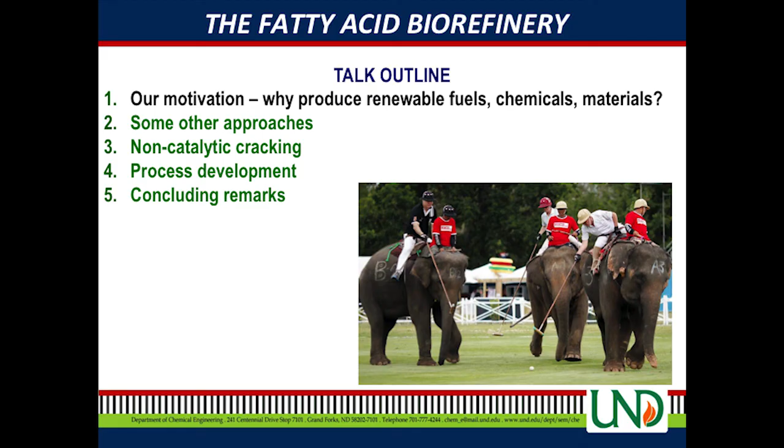All right, so let's get back to our talk, and we'll talk about our motivation. Just seeing if you're awake. We don't actually have any elephants in North Dakota. We have some extinct mastodons, but that's about it.

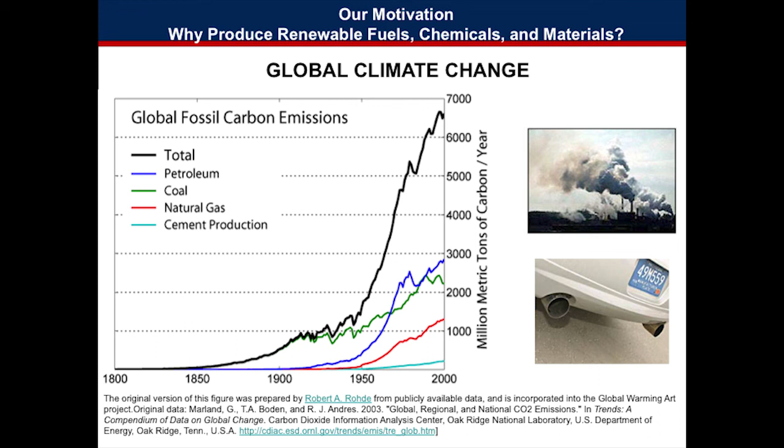So, of course, the motivation is why you're all here in this society anyway, and that's global climate change. This is a much harder argument in the U.S., where, believe it or not, probably almost half the population is very confused about the issue. Scientists are not confused at all, but about half the population has no idea anymore because they keep hearing lots of words from both sides. I don't think you have quite as big an issue with that here in the UK. I could be wrong. If I am, let me know. But I'm sure you get some pushback anyway.

But in particular in North Dakota, where I live, it's a very conservative state and very pro-business, and anything that smacks of a new regulation is verboten. But you know the argument. What you cannot argue with is the fact that we've taken a lot of carbon that has been below the ground for a lot of years, and we've put it in the air. And carbon dioxide does have different physical and thermal properties than nitrogen and oxygen, right? It has a higher heat capacity. It has a higher radiative reflectance, right? And these things all do bad things for the environment.

I think most global scientists now believe we are past the tipping point. Global climate change is now irreversible, at least in the short term. So it's going to be many, many years before the world can turn it around, but we have to at least start slowing down before we can turn it around. And so that's the challenge that you will face, youngins, because us old gray hairs, we didn't fix it. You get to fix it.

Our predecessors left us tons of stuff to fix. We fixed some of them. Some of them we didn't know about, like this one. So you get to fix our mistakes. That's the way it works. And then your mistakes, you get to pass down to the next generation. And that's why we need people to train the next generation of researchers, and we need the next generation of researchers. All right. Try not to hold it against us too much.

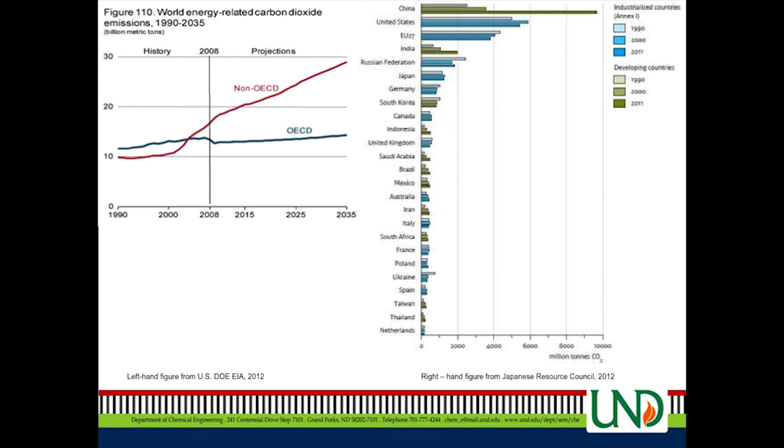Okay? So if you want to deal with global climate change, you can't just deal with it in our countries. We have to look at global solutions, which means understanding what is important in those global societies. What is it that will allow them to move toward the solutions to global climate change? They won't be the same as here or in the US. Okay? There's different motivating factors. There's different issues they are dealing with. And we have to understand them and look for solutions within the context of what they're dealing with.

Or they just simply won't go along with it. And there's nothing the rest of us can do. And nothing will get done. So we have to work with them, cooperate. But that leads to an opportunity. Anytime we have to cooperate globally, there's room for dialogue, better understanding across the globe, and that tends to lead toward peace rather than war. That's always a good thing.

By the way, in case you can't see it, that's where the UK ranks by itself. It's currently just in the top 10, about to fall out of the top 10, as CO2 emissions in the UK have actually gone down rather than up, as they have in all of Northern Europe.

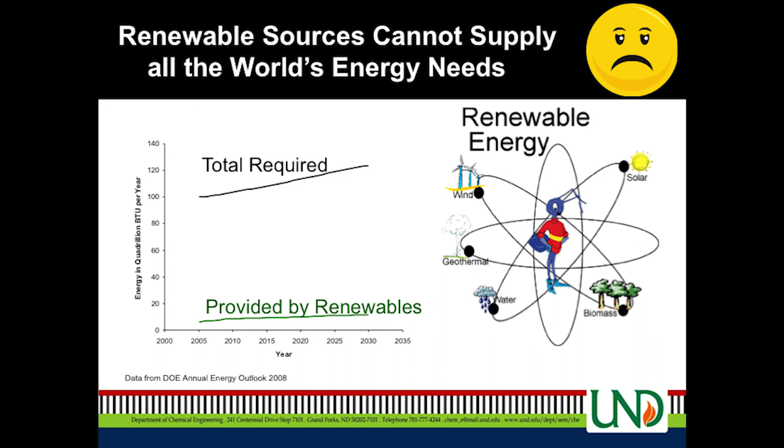Right. Okay, so talk about renewable energy. That's good because, of course, renewable energy can't solve the problem. So why work on it? Does this surprise you? Did you already know this? Renewables are not the answer. Okay? Look, even if this projection from the Department of Energy in the US in 2008 is off by a factor of 10, we're not there, okay? So renewables in and of themselves will not solve this problem, will not allow us to displace all of the fossil energy that we use, okay?

But it can be part of the solution, and that's why we keep working on it. So along with conservation and efficiency gains, the environmentally acceptable use of coal, efficient use of petroleum with gradual replacements to avoid economic disruptions, and that's a key for the developing world, and breakthrough technologies of the future. These are the areas like actual affordable solar energy, things like that. These are the technologies that we need.

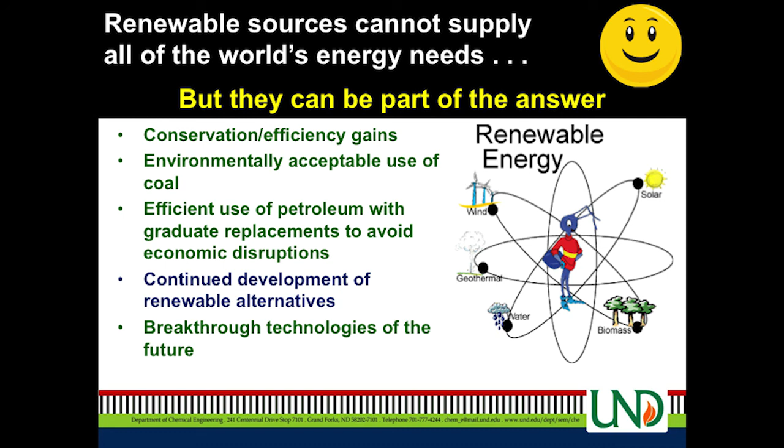If somebody could figure out a way to safely deal with the waste from nuclear power plants, we'd be golden. Then we'd have an answer. But as long as we can't yet deal with it, it doesn't matter that it's a real small amount of waste if it's got a 10,000-year life, right? It's a leaky faucet with a bucket under it. Drip, drip, drip. The bucket will fill up. So we need these types of solutions in order to move ahead.

And we have to work on all these fronts because there isn't another thing like oil, right? There isn't another one of those that we can just grab. Okay, we kept this one because we were waiting until oil was done. Oil's about done, let's go grab it. There's nothing there when you grab, right? So it's a lot more complicated, the problem's harder.

That shouldn't surprise you. If you're working on research in your lab, recognize that your research will be harder than that of your advisor, your sponsor, your faculty member that's looking over your shoulder. You know why? They did the easy stuff, they left the hard stuff for the next guy. And we said the same thing about the generation before us. It always gets harder, more complicated, et cetera. Easy solutions get done early, right?

All right, so let's look at some of the other renewable approaches.

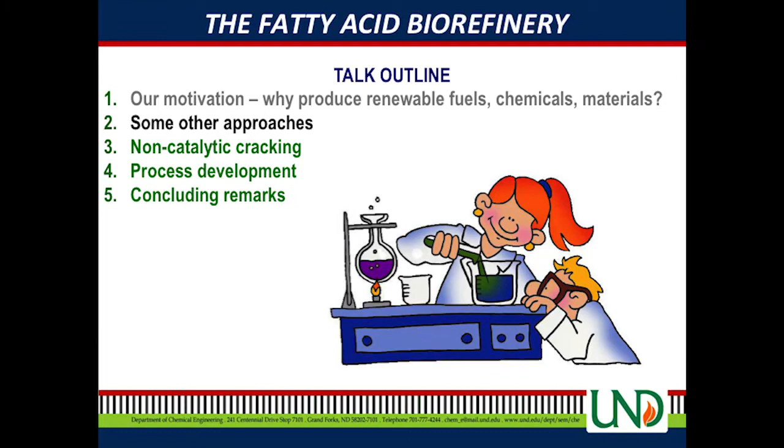So are you motivated now? You okay? Anybody asleep yet? Not yet? Okay, good.

All right, so first some practicalities. Feedstock costs are dominant, okay? It's actually pretty cheap to pull oil out of the ground, even with the harder to get oil that we have today where we're down 10,000 feet and running 5,000 foot horizontal stringers and fracking it. It's still much cheaper than it is to grow this stuff.

Okay, so feedstock costs are dominant, and that's why a lot of people are trying to look at, can we utilize waste better? Can we look at stuff that we don't really want to use for other things? In the US, because we produce a lot of the world's food, we're spending a lot of time looking at integrating fuel crops into the rotation.

So we're not actually displacing food crops, which is one of the big myths, by the way. You rarely actually displace a food crop with a fuel crop. Food crops are just worth more. You just change your crop management practices to add them into the rotation instead of something that was worth less. Farmers are great capitalists. They figure out what makes the most money, and that's what they're going to grow and keep their land going. So we do a lot of that.

So feedstock costs are dominant. The key is trying to convert as much of the inlet carbon into something usable as you can. And the other part about that is if you're not converting it into something you're going to use, where do you think it ends up? It's going into the air, which is what we're trying to avoid. So we want to use as much of that carbon as we can and put as little of it into the air as CO2 as we can.

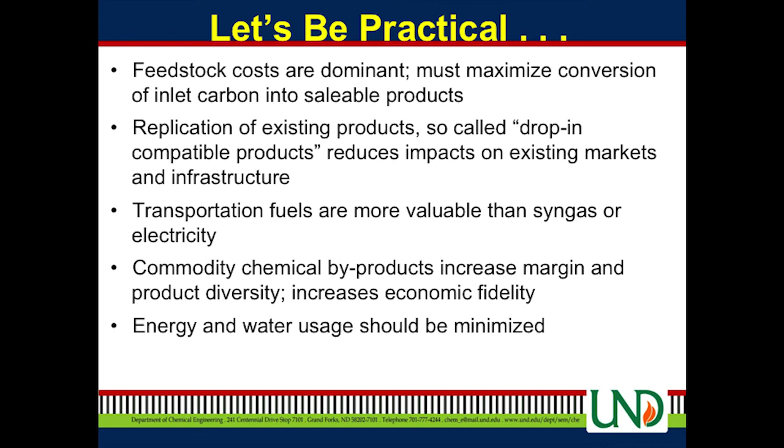Also, transportation fuels are much more valuable than syngas or electricity. So if you're making a methane replacement or you're making electricity, that's a lower value product than a transportation fuel. Transportation fuels have to be liquid, they have to have high energy density, they must be stable, and they must operate over a large environmentally dynamic range, right?

So they have to operate in the winter, they have to operate in the summer. There are changes to the blends that refiners make, but it's not a lot. The basic components are the same. So it has to have a lot of dynamic range. That's why fuels are heterogeneous, by the way, transportation fuels. They're not made of one chemical compound. They're heterogeneous on purpose because it gives them that dynamic range. It gives us the ability that when I hit the accelerator, I have compounds in there that are good for that range, and when I'm at idle, I have others that are good at that range. Things like that increase the overall efficiency.

Commodity chemical byproducts increase the margin and the product diversity, which increases the economic fidelity of a fuel plant. Petroleum refineries are enormous, and they're incredibly efficient. There may be no more efficient industry in the world than petroleum refining. The margins are very, very low. And because of that, that's who you're competing against with a brand new technology. It's very hard to do. So you need something to give you an advantage. Plus, those petroleum refineries are also producing lots of byproducts that have more value than the fuel. So if you don't have them, how are you going to compete against them?

Now, when you're talking about byproduct chemicals here, you can't be talking about, say, an ingredient for a pharmaceutical, like a new antioxidant. One plant will provide the world's supply. What are the other 990 plants going to do? They can't make that one because the market's saturated. So you need high volume commodity chemicals, which drives you very much to polymers. Polymers are ubiquitous in society. They're everywhere. You're wearing them, you're sitting on them, you're seeing through them, everything we do, we use polymers now. It's the biggest market we have.

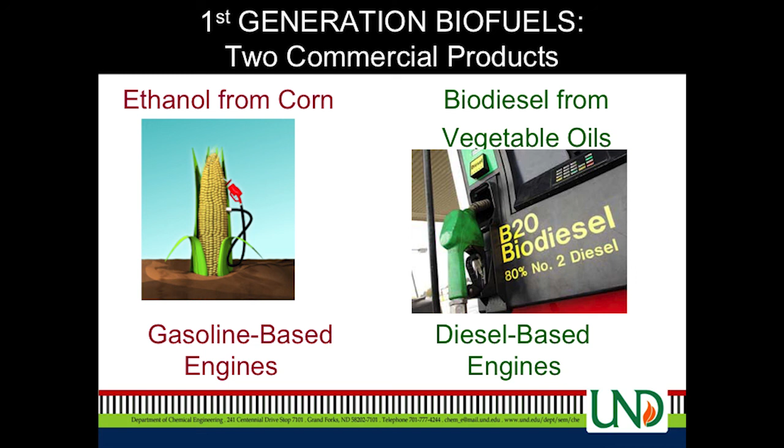So ethanol from corn, which goes into gasoline engines, is one of the two commercial first generation fuels. And the second one, biodiesel, is basically a thermochemical way to do that. So those are the first two that came out.

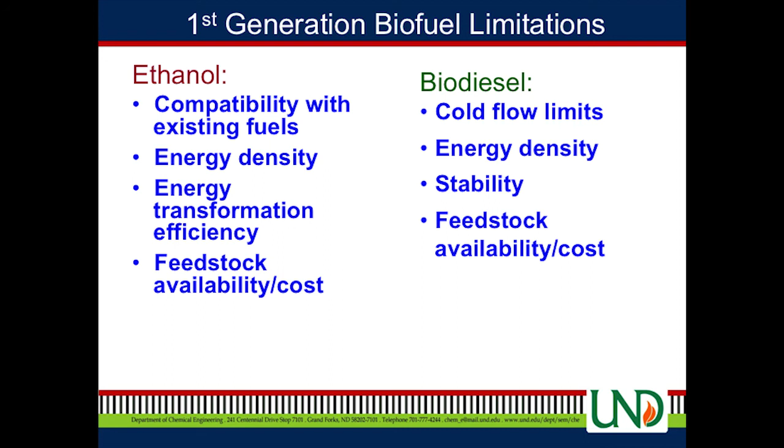They have some clear limitations. Ethanol isn't really compatible with gasoline—one's polar, one's non-polar, right? You really have to work to get them to mate together. At small concentrations they're fine, which is where the limits you see on them come from—E10 and E85 are the limits, that's the solubility limits, by the way. You can boost those up a bit with some expensive additives, but we'd rather not do that. There's also energy density problems with ethanol, so you won't get as much per volume of fuel you put in your tank—you won't go as far. And the energy transformation efficiency for ethanol is fairly low. There were a lot of arguments when it first came out that it actually took more energy than you got. I think most people are convinced it's probably about a wash, but it's not that efficient.

And of course, if you're making it from corn, you're competing with food and you have feedstock availability issues, although the market does adjust to a lot of that. When I moved to North Dakota in 2000, the corn line was about 80 miles south, almost to the South Dakota border. The corn line is now up into Canada—that's how far north it's still profitable to grow corn. Corn has a longer growing season, and you can grow it longer for fuel than for food because you can let it freeze. You can do that for cattle feed too—if you're feeding corn to livestock, you can let it freeze and harvest it after, and you can do the same for fuel. But if you're going to eat corn, you don't want it frozen on the stalk—believe me, it doesn't taste good. We've already had freezes in North Dakota since probably early September, so it's a much shorter growing season.

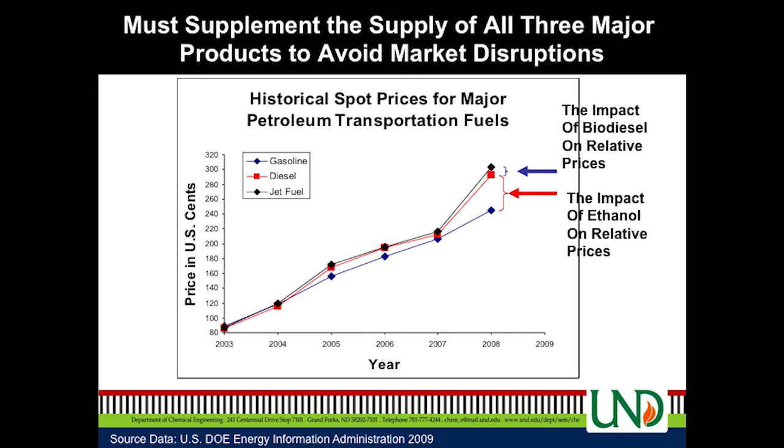Here's the data: around 2003, the wholesale delivered spot price of these three fuels was essentially the same. See that? By 2008, look now—see the gap at the bottom? That's what I call the ethanol gap. That's what ethanol being introduced to the market did to the prices.

I heard somebody just the other day say, even here in the UK, do you remember when diesel was cheaper than gasoline, than petrol? Remember that? All right, you weren't born yet—just kidding.

So it's going like that. The poor airlines are really getting hit, because nobody's going to run a refinery just to make jet fuel—it's the smallest of the three. So if we could completely replace gasoline and diesel, we'd better have something for the jets, or air traffic will come to a halt.

Now in the UK, that's not as big a deal for you—you have these things called trains. But in the US, where you'd take a train, we fly. Because for you, going all the way across the country is about a 6-hour train ride; for us, it would be a 40-hour train ride. Where I live, it's a long way to anywhere—6.5 hours to the nearest major city of a million-plus people. You're near the ocean, so this distance problem is significant for us.

So what that means is we've got to make sure we don't just solve one problem and create others. We have to be mindful of this.

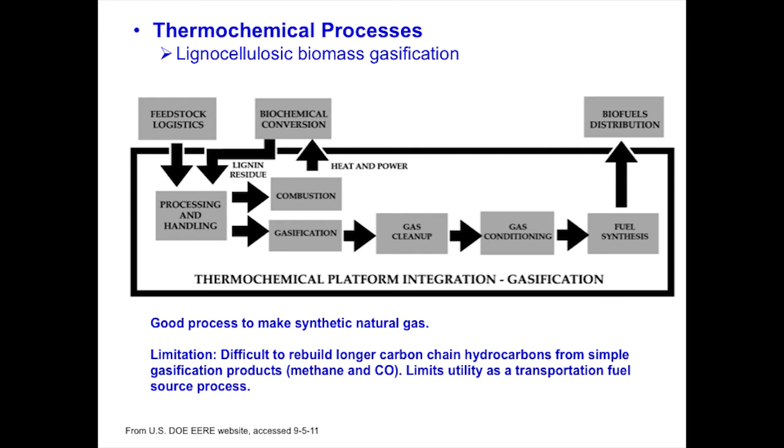It's good for making synthetic natural gas, by the way. Gasification is great for that, very efficient. It has some issues, but it's not bad. But it's really difficult to rebuild longer carbon chains. It's very inefficient and very expensive, and hence this technology is stuck at that last box, fuel synthesis, because it's just really hard to do.

The best process developed for this was developed in World War II, believe it or not. It's called the Fischer-Tropsch process. It was developed by the Germans, who had no more access to petrol, and so they developed it. They knew it wasn't a real good way to make it, but that's what they had, so they did it. And that's still the best way today. Nobody's beaten it yet, and there's a lot of people trying, I guarantee you, but not yet.

So it's hard to build carbon chains up. But do we have to really gasify it all the way to methane? The answer is no, and we can do what's called fast pyrolysis. A fast pyrolysis unit is basically a bad gasifier. You decrease the residence time a lot so it's only in the gasifier, the combustion unit, for a short period of time. You do it without oxygen, and all you're trying to do is partially break those bonds. You just want to break a few of them, not all of them. That was kind of the original concept.

You do that, everything comes out of the top as a vapor, or it's a char. You collect the char, which you can use for all kinds of things. Then you take that vapor to a condenser, condense all those big molecules down, and now you've got bio-oil. We're in business, right? Wrong. That oil is the nastiest stuff you've ever seen. And depending on what you've made it out of, it may not even be an oil—it may be an emulsified goop, because there's enough polar stuff in a lot of it that it'll emulsify into a big goop.

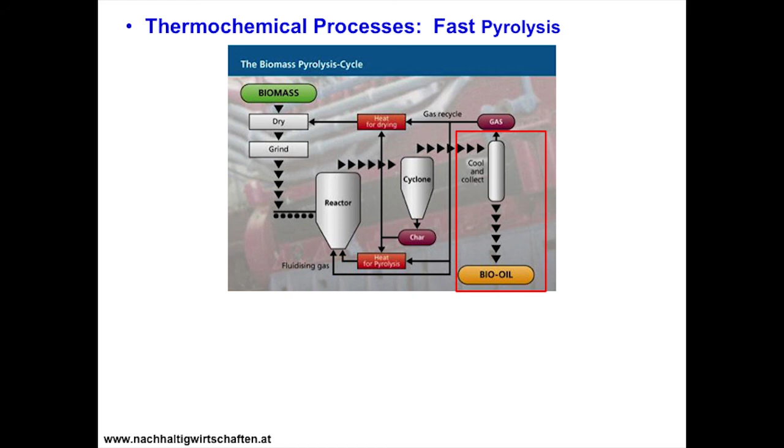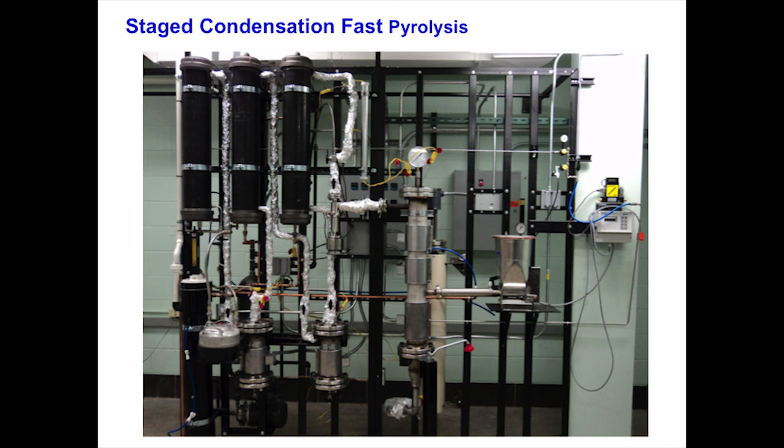So when we come to this part right here, let's not cool the whole thing and condense it all at once. Let's condense it in stages. Let's take the heavy bits first, then the next bits, then the next bits, all right? We came up with that concept independently of two other groups that came up with it at essentially the same time. This is what our unit looks like—ours are just as ugly as the units you make, all homemade, built by students.

So the biomass gets ground up, goes into the fast pyrolysis unit, stays in there about half a second—that's this part right here on the diagram. Then we come out of there and go into the second section, which is three condensers. We have a condenser and a collection pot, condenser, collection pot, three of those, and then the gas out the back. If we wanted, we could refrigerate that down and get even more stuff out.

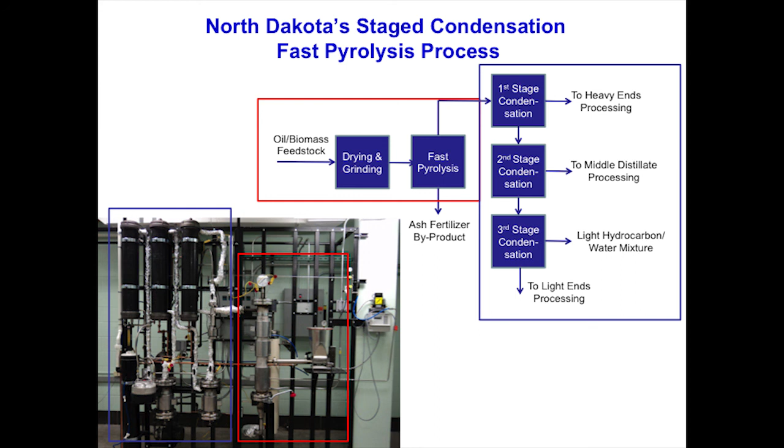What you find when you do this is you'll get this really nasty stuff—the real heavy stuff you don't like mostly comes out in the first cut. The middle stuff actually looks pretty decent for processing into transportation fuels, it's actually workable. And the light hydrocarbon-water mixture—all the emulsifying agents were in the heavy cut—so now they phase separate and you can do stuff with them and use them. So it looks like a pretty attractive concept.

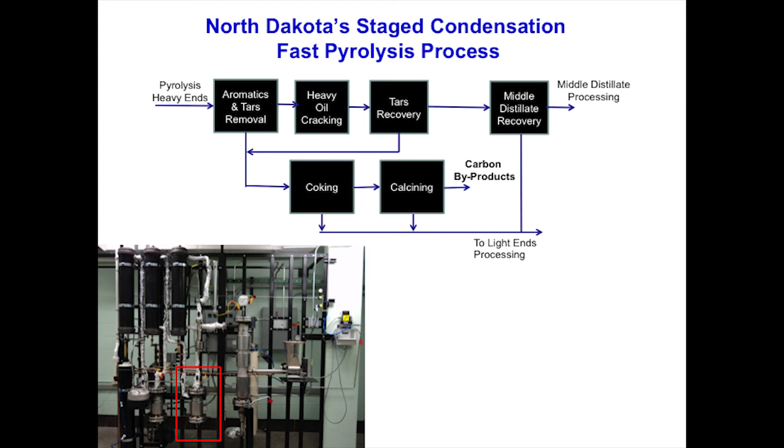The heavy ends—what our concept is, one way you could do something like this—is to take those heavy ends, separate out the aromatics and the tars from the longer chain hydrocarbons, crack the oil, take the tarry stuff and coke it, crack the oil and coke the tar stuff, and you can get a really nice carbon product, very pure. Because if you make this from biomass, all those metals and things that are in coal and petroleum aren't there.

So it's actually a really nice, clean, high-grade, anode-grade coke, which is used for all kinds of things, anodes and other things.

Middle distillates, you knock out the heavies and the lights that are still in it because we just did one crude condensation. Then we can deoxygenate it in a number of different ways, and then probably do one trim purification, and we should have our products. Or a series of purification and separation units, distillation, but stuff that's easy to do and we know how to do. That's the good stuff that we'd like to make in a product.

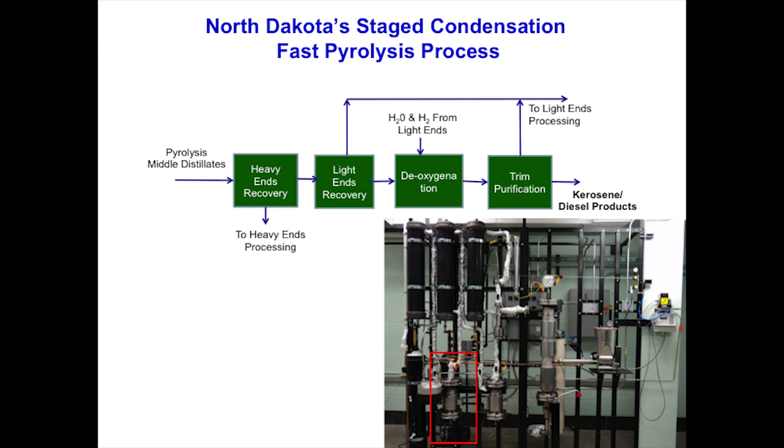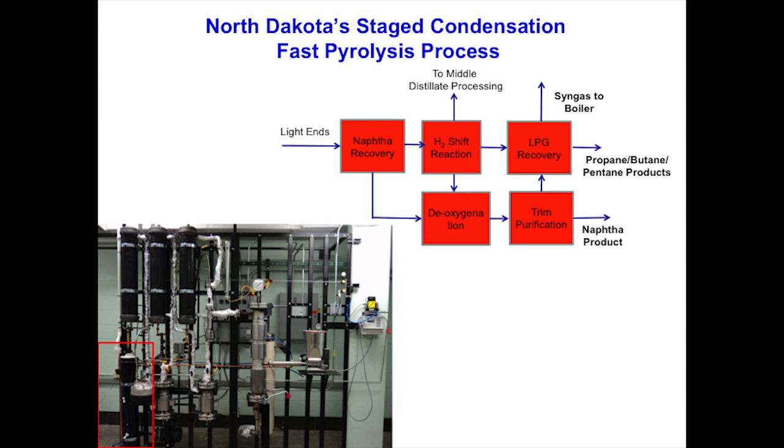And then the light ends, we can recover some naphtha out of that to make a naphtha product. We can make propane, butane, what's known as LPGs, and then the syngas we can send to the boiler, and we can even shift some of the CO and make some hydrogen if we want to use that for our deoxygenation. So that's one concept of how you might do that.

All right. Going to the biochemical, I'm running way late, sorry. Oh well. Fermentation alcohols, of course, was the first way this was done with yeast. There are now, but that bioreactor can also be bacteria, it can be algae, and there's lots of different things that people are suggesting in trying to do that. That's not really my area of expertise. I will say this about it.

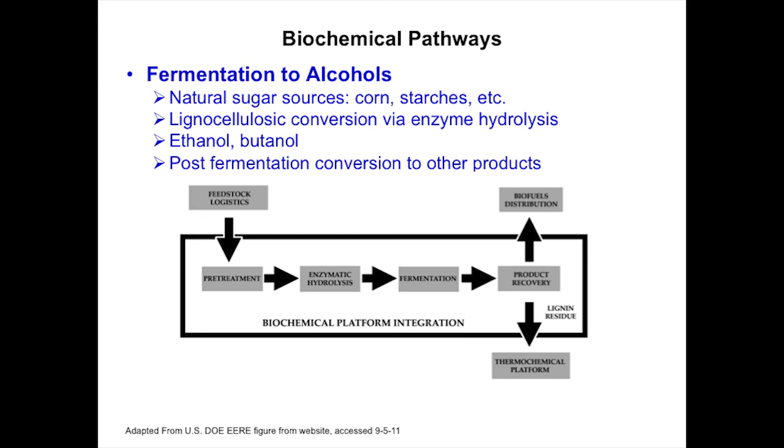Although some of these are fairly intriguing, they're probably better for chemicals than for fuels. And here's why. They usually make one thing, so you have purity on your side. Purity is good for chemicals, bad for fuels. Dynamic range, remember? Secondly, bioprocesses are inherently less efficient than chemical processes.

You've got to deal with running at least semi-batch in operation. You have to keep things alive, so that gives you kinetic limits on temperatures and pressures and things like that. And so they're never as efficient as chemical. So if there are two solutions that look equally viable, and one's chemical and one's biochemical, the chemical one will almost always be better commercially than the bio. It's not 100% true, but it's usually true.

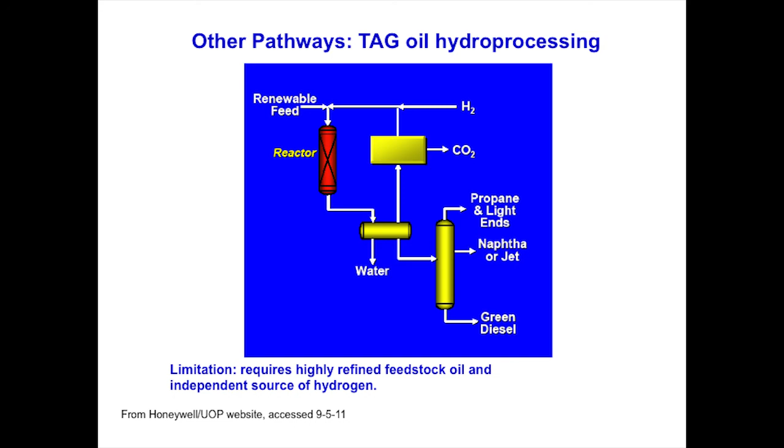Triacylglycerides are made by crops. It's a glycerol backbone with 3 fatty acids on it. So you, as a mammal, make fatty acids, free fatty acids. That's what that is, right? But most living things make triacylglycerides instead of free fatty acids. So they're made by all kinds of things, bacteria and algae and lots of plants. It's amazing how many plants make these things. Every time I turn around, I'm finding another one. Anyways, that's the feedstock here.

You go into the reactor. You blast it over a catalyst, which will knock off the backbone, deoxygenate the acid group on the fatty acid, and some of them also isomerize, or they'll do that in a second step, so that you get this dynamic range and mixture, and you come out of there with a reasonable jet diesel cut.

During the separation process here, some of that will crack. It naturally will crack, and they'll get some light ends on top of that. That's the process that is mostly going into the world today. All the airplanes that are flying green jet fuel today are flying hydrotreating fuel today. Right now, their limit is 50% of the fuel. And there's a reason for that, which I won't go into because we don't have time. You'll just have to figure it out.

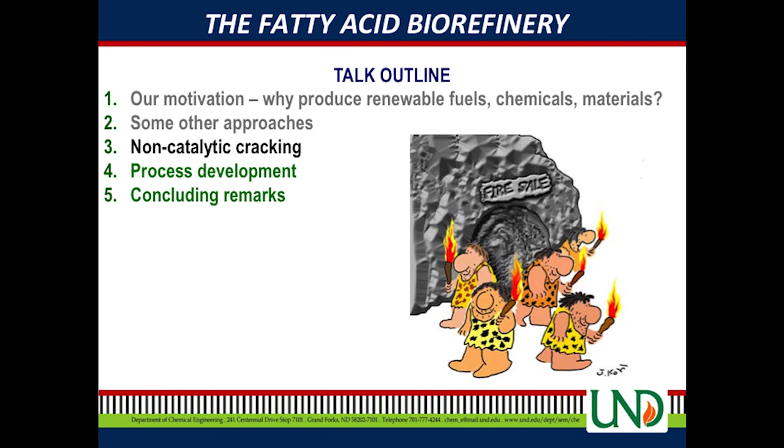All right, let's talk about my stuff. So our stuff is non-catalytic. It's thermal cracking. So instead of hydrotreating, we're just going to pyrolyze. So it's just like pyrolysis, except the conditions are slightly different.

We fell into this. I had a post-grad that I didn't feel very confident giving him a catalytic reactor with. So I said, let's start with non-catalytic, and if you can do that, I'll let you do it with a catalyst. We never got to the catalyst because it works so well with the non-catalyst. I had subsequent students look at it both ways, and what we found out was that catalytic cracking isn't actually catalytic cracking for triacylglycerides as it is in hydrocarbons. It's actually non-catalytic cracking with secondary reactions occurring on the catalyst.

Okay, so you can do those secondary reactions all in one step, put the catalyst in the reactor. That means when you form tars, it gets all over your catalyst. Or you can separate the two steps out, do the non-catalytic cracking, recover the tars, put the non-tarry stuff over the catalyst, and do what you wanted to do with the catalyst separately. Your catalyst will last longer, and you've also recovered the tars instead of turning them into CO2. That's the advantage of this process.

Okay. It produces drop-in compatible fuels. The fuels meet the petroleum specs, not the hydrotreating specs. To meet the hydrotreating specs, we would remove the aromatics that are in it, then turn around and sell them back to the airline or the fuel company so they can blend them back into the hydrotreating fuel to make a full fuel, which some of them do.

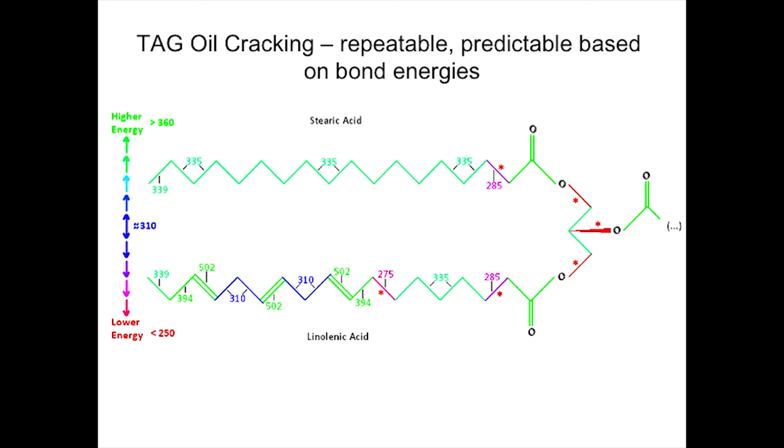Okay? Now, I say that even though that's what you get. Look at the complexity there. It is repeatable and predictable, even though you're getting 300 plus compounds. Given the exact same fatty acid composition, I can crack it multiple times and I will get the same profile within the limits of analytical accuracy. Okay, so it is predictable and repeatable. So you make a diversity of things. That's good for fuel, not as good for chemicals. But you make some interesting things.

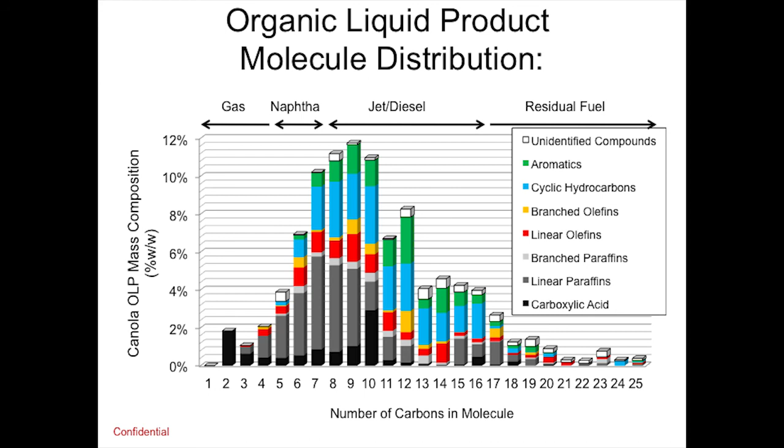You make a lot of carboxylic acids. Turns out they're almost all alpha carboxylic acids. You make a lot of olefins, and the linear ones are almost all alpha olefins, which is also good if you want to make chemicals out of them. And you'll notice there's the aromatics that I said you have to remove otherwise. You see also where this is. Now, most triacylglycerides are primarily centered around C18, C20, and that's why when you break them apart, you get a lot of C7s through C12s. That's the sweet spot. That's what we want. That's middle distillates. So that's why we like this.

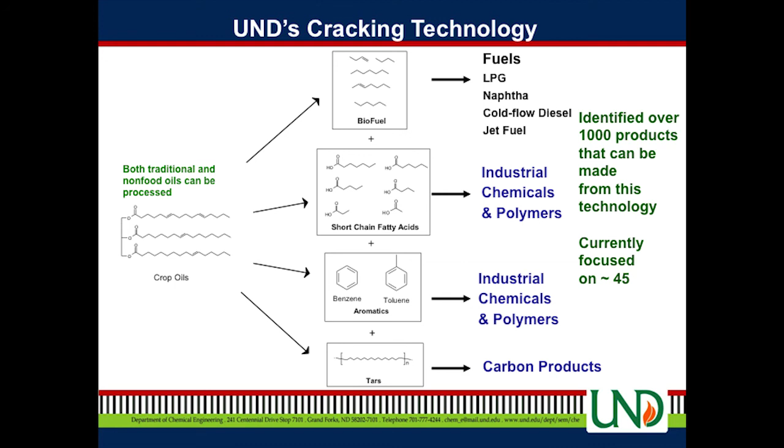So we can use all kinds of different oils. We're going to make fuel, and we can make some chemicals out of the short-chain fatty acids and the aromatics and carbon. We've identified a lot of things we could make, and we focused in our lab on about 45 of those, actually demonstrating them. The basic scheme is you put the oil in the reactor, break it apart, you end up with light, non-condensable light fraction, middle distillate fraction, heavy fraction, separate them out, treat each one separately and get your products.

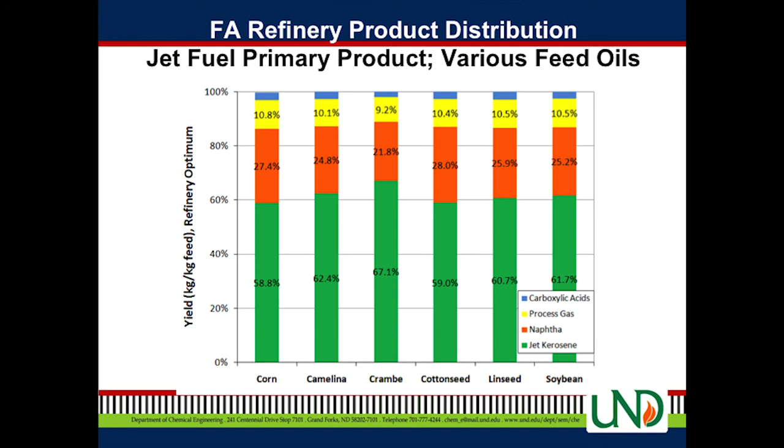So we've run a lot of different oils. Here's a suite of 6 oils we ran, and you can see that it's fairly consistent in composition. You get mostly jet fuel if you want to run it for jet fuel. You can crack it differently to make more diesel and naphtha, but notice that the gases are very low. And that's good. You don't want a lot of gas because, again, syngas isn't worth as much as the fuels.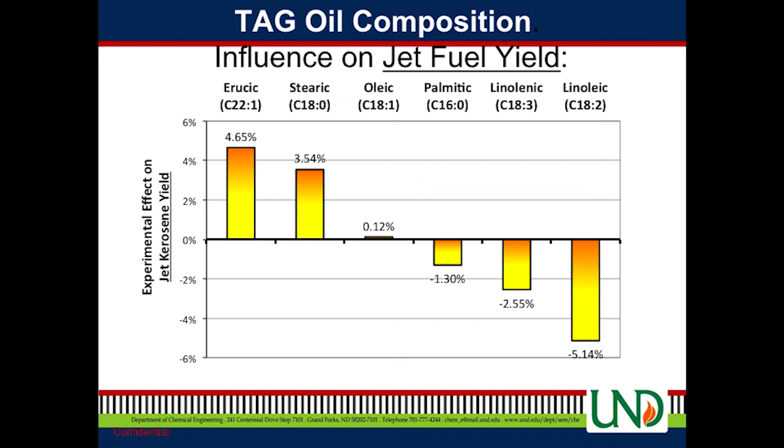We can predict the influence. We've done enough runs now and have models. We've run hundreds of cracking reactions of everything imaginable. So we can actually predict what the effect of a different fatty acid chain in a plant will be. So we've actually worked with Bayer CropScience to look at some of their non-edible crops like camelina and some high erucic brassicas to, not genetically modify, but naturally mutate those crops toward having the types of fatty acids that increase the yield of the fuels.

Right. So why do we want to do it non-catalytic? I've kind of said this already. Catalysts will foul. In a petroleum refinery, you have good metal catalysts. They're robust. You can fluidize them, send them to a regenerator, burn the carbon off to CO2, put them back in. Here, you're primarily looking at zeolites or silica alumina-based catalysts. They're not nearly as robust to do these catalysis. Or some of them are platinum on carbon, very expensive catalysts.

In any event, if the catalyst is in the bed, the tars will gunk up the catalyst. You will have to burn it off. And so that's up to 10% of your inlet carbon that's going up to CO2 that in our process we actually recover. So if you design your reactor right, it's not going to plate out on the reactor. You just have to design it right.

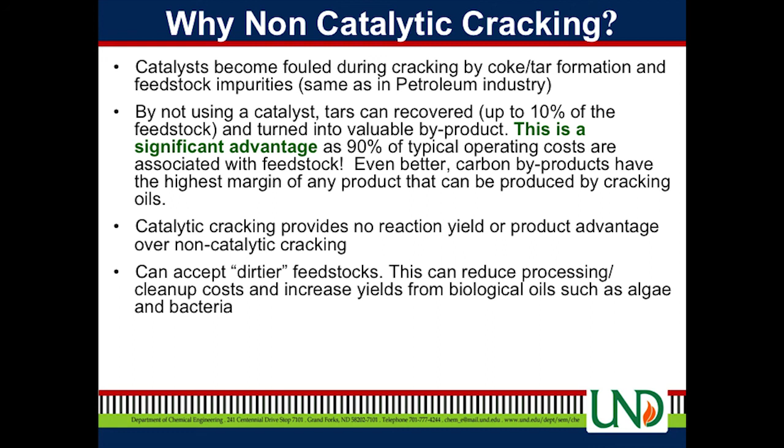Also, we get a better diversity of byproducts, so we can make better things than you can from a hydrotreating process. And we can accept dirtier feedstocks, and again, that has a lot to do with the fact there's no catalyst in the first bed, that a lot of things like cellular debris and stuff tend to cause problems with. And so in ours, it's not in the first bed. All of that goes out with the tars. And so it's a little nicer process. And so for biological oils like algae and bacteria-based oils, there's a clear advantage here.

One company that's doing biological oils from bacteria told us that it's worth up to 25 cents a gallon to them. So that's a huge amount.

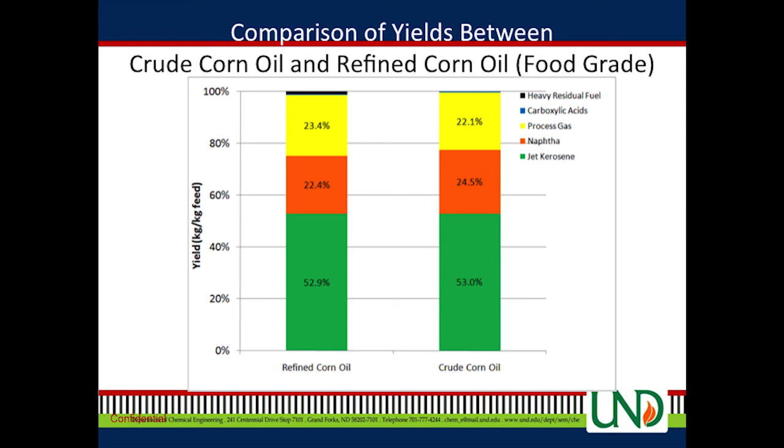There's some data on crude and refined corn oil. So we went to the ethanol plant and pulled out their corn oil at the end of the plant where it's been all beaten up and got all kinds of stuff in it. And we ran food grade oil that you'd buy at the store, and you can see the results are basically the same. We did that also with a crude bacterial derived oil. Comparing that with soybean and canola, you can see, again, about the same. So it's not even the refined stuff, just the crude stuff.

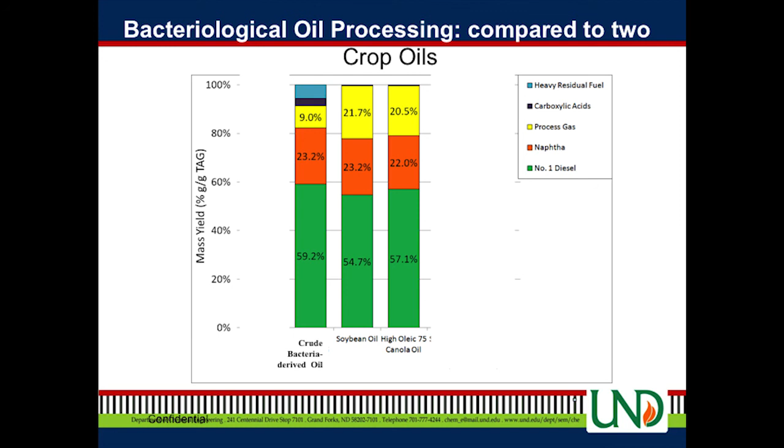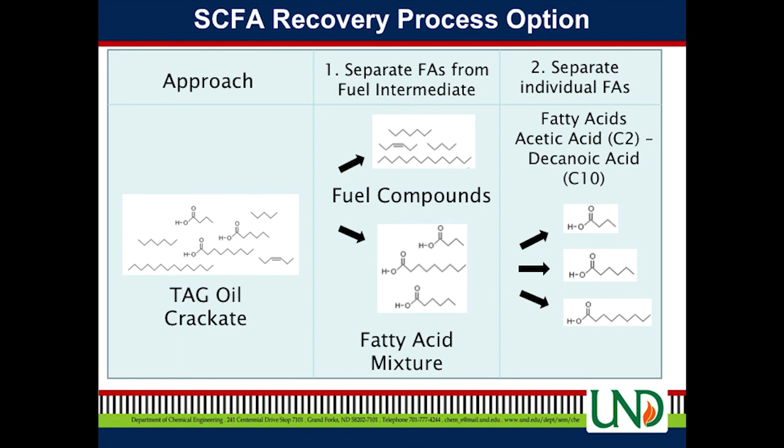Byproducts can have a significant cash flow value, and they de-risk your product, so you'd like to do those. So the ones that have the most value for us are the short-chain fatty acids, C2 through C10. There's a lot of uses for them. They're big market ones. They're easy to get. And so I'll tell you about that in just a second as we move now into process development. So the basic concept, cracking, but now you got to develop a process for it. So I'll tell you a little bit about that.

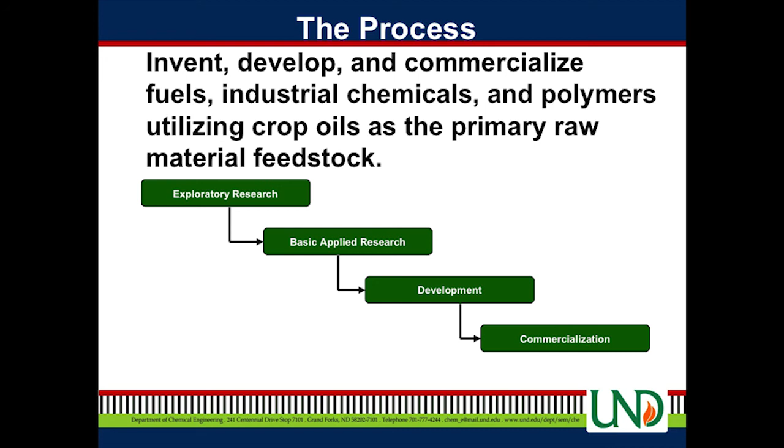So here's the process of developing stuff. You got to invent the basic concept with exploratory research. Then you do the applied research to actually get it reasonable. Then you've got to develop it, which is to get it basically data that would make it amenable for commercialization. And then you got to scale it up. So that's the pathway you have to use.

So our concept is the fatty acid biorefinery, multiple feedstocks, multiple products. You can feed it any or all of these. You can mix them, blend them. It doesn't matter. Once they go in the cracking reactor, it really doesn't care. The conditions for cracking are slightly different depending on the feed, but not a lot. It's just, you know, maybe 5 degrees different up or down. The product mix will be different coming out the back, and you can make lots of stuff.

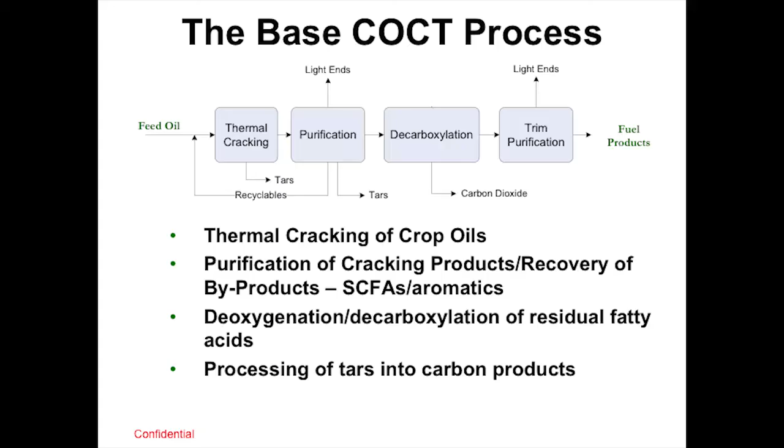The basic process, we went through this before, but some other things that you can do. There's a lot of propylene that we generate. When we break off the glycerin backbone, we don't make glycerol, unlike these other plants. Like a biodiesel plant, you get tons of glycerol, right, when you break that glycerin off. Instead, we make propylene. Okay. Well, propylene is good. You can make aromatics from propylene. We make ethylene, butylene, and so those three we can feed to a reformer and make some aromatics.

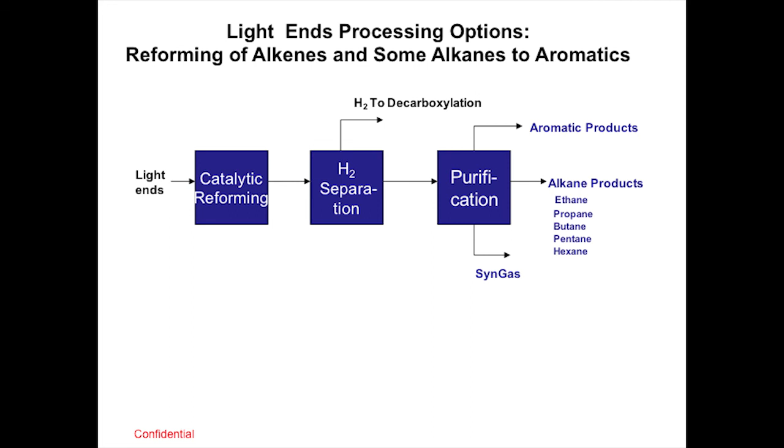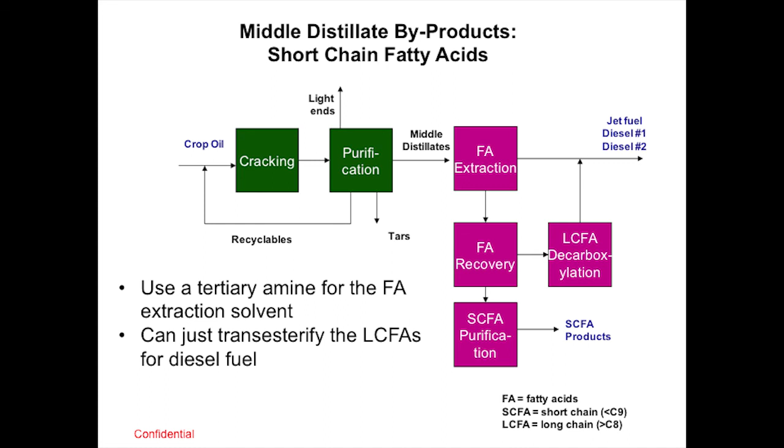And if you want to get the aromatics, we use sulfolane. That's the exact same way that aromatics are extracted in a petroleum plant. It actually works fine in this as well. Okay, and then we got the heavy ends. And what we do with the tars, this one has been fully developed. We can take the tars and we can basically coke them into anode-grade coke.

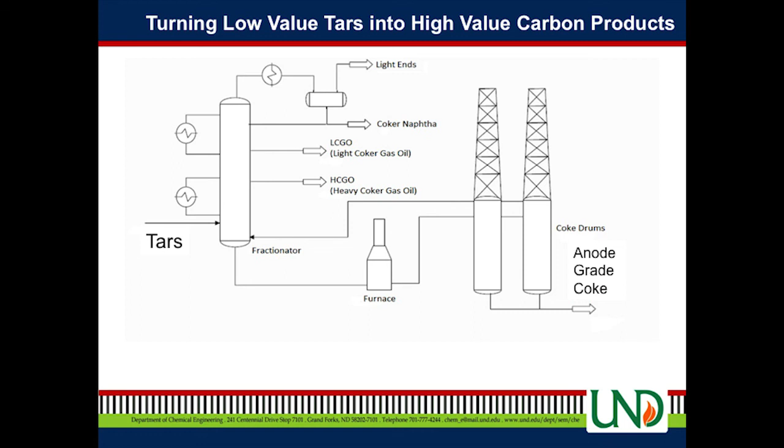Okay? But the one we're still working on and the one we're most excited about, this is an alchemist's dream, making mesophase pitch for carbon fibers, continuous carbon fibers. So that is a very high volume, very high value byproduct if we can make it. In fact, you would run the plant to make as much tar as you can if you can make the carbon fibers. We're pretty close. We're still getting discontinuous carbon fibers out of it, but we're getting close. I think by the end of this year, I think we'll be there.

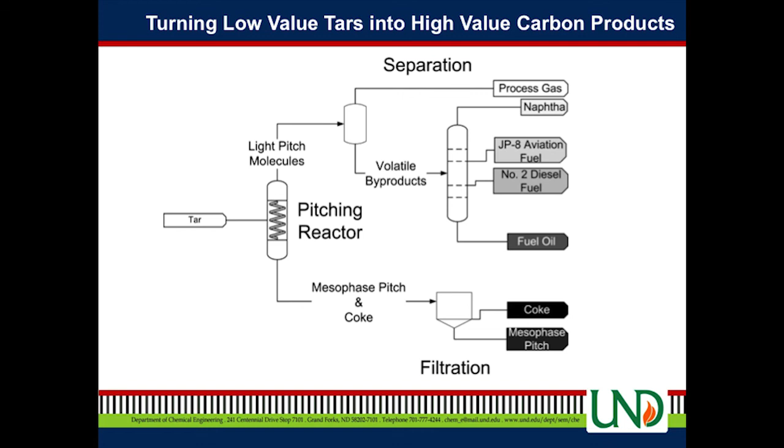Right, so how does this look commercially? This is what we project. So if we have a 50 million gallon per year fuel plant, which is kind of a typical standard DOE comparison size that they use, this is what you're going to make. You put your oil in. This is all based on soybean oil, but it could be other oils. You're going to get about 25% jet fuel, 34% diesel number 2, 12% naphtha, and then some bits and bits.

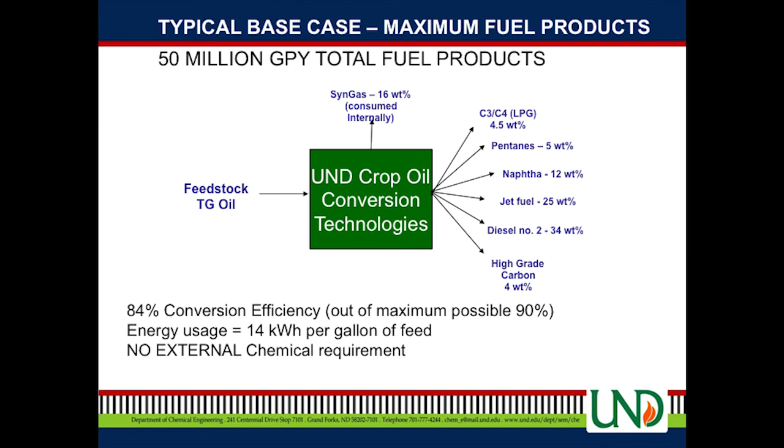84% conversion efficiency. The most we can get is 90%, okay, out of ours. That's the theoretical maximum. The rest is going to CO2, no matter what we do, once you deoxygenate the carboxylic group. And it takes about 14 kilowatt hours per gallon of feed, and there's no external chemicals. There's no external hydrogen needed like a hydrotreating plant.

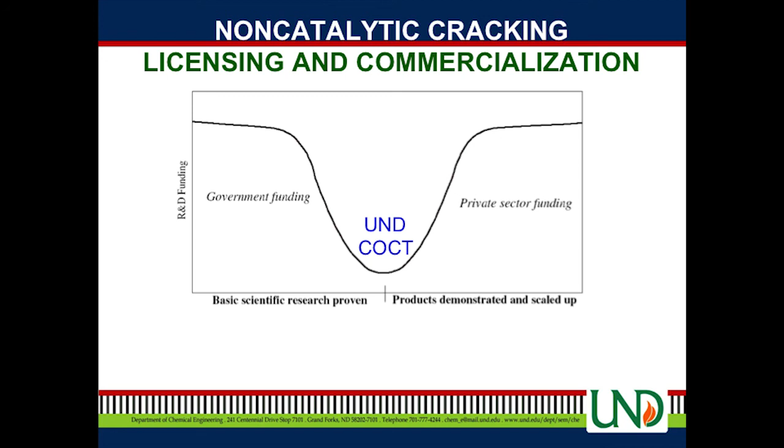The problem is I need to scale it up to a demonstration scale size, and then build a commercial plant. The cash flow is longer than 2 years, and venture capitalists don't want to touch it. I need somebody that will commit to a longer cash flow to get it in the market. We've had people that want to do that, but they don't have the money. The people with the money haven't wanted to do it.

I'll tell you that in the last 7 years, I've rarely been more than 90 days away from having my money, and it keeps moving. Even today, there's a group right now evaluating it that says, we really like it, we think we're going to do it, we just need a little more time to evaluate the numbers. I'm 90 days away, even as we sit here today, and have been this whole time.

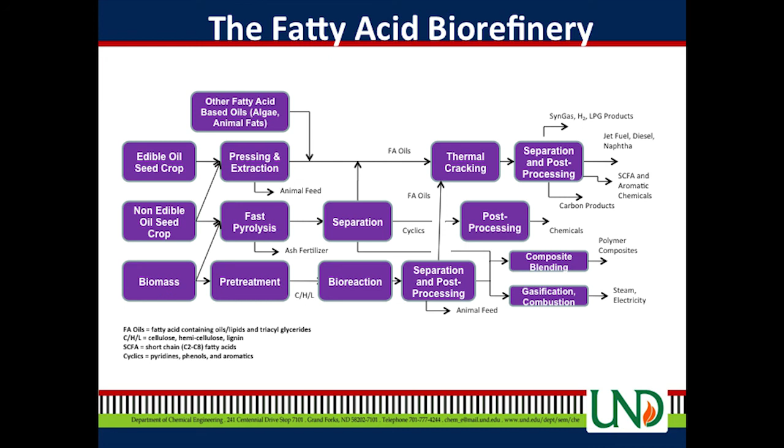Some of these are not as far along as the others, but that's kind of the ultimate vision of where a full fatty acid biorefinery would be. It looks very complicated. It is, but think of how complicated a petroleum refinery is. They're very, very complicated, and that's what you're competing against.

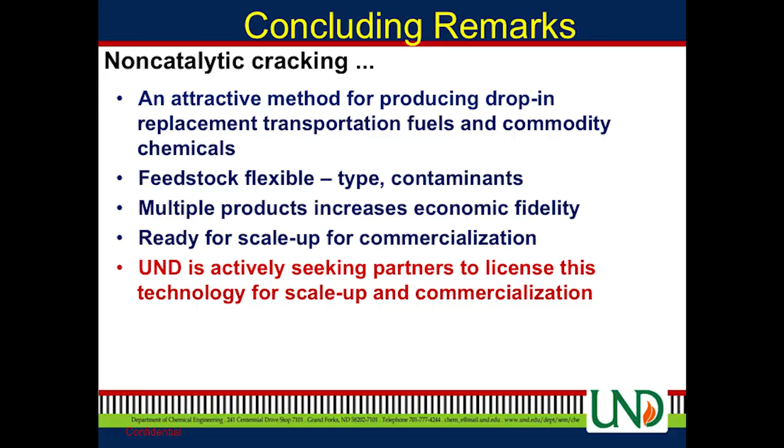So, some conclusions. I think it's an attractive method for producing drop-in replacement fuels and commodity chemicals. It's feedstock flexible, multiple products, increases its fidelity, it's ready for scale up, and we're looking for partners because we're stuck in the valley of death. Hopefully you got some stuff to think about how one of these gets developed. So thank you for your attention, and I'm ready for you to grill me.

In the U.S., the federal government policy right now is that global change is a problem, it's a compelling problem, and needs to be addressed immediately. But state governments in the U.S. have a lot of autonomy in some areas and not in others. So it's a very different system than here. Our state is one of those that absolutely says global climate change has not been proven, and therefore we shouldn't be jumping the gun to address it.

Okay? Yeah, I know. You have to remember, we have a lot of coal companies in our state, and unfortunately they've decided to take the position of the ostrich - that's probably the best way I can put it. But they put out a lot of information, and there's a lot of political spin that goes on in the U.S. A lot of investment in political spin. We have these think tank groups where you have people with absolutely no technical background issuing statements about reports and scientific findings and conclusions that have no basis in fact. It's very common. It's happened a number of times.